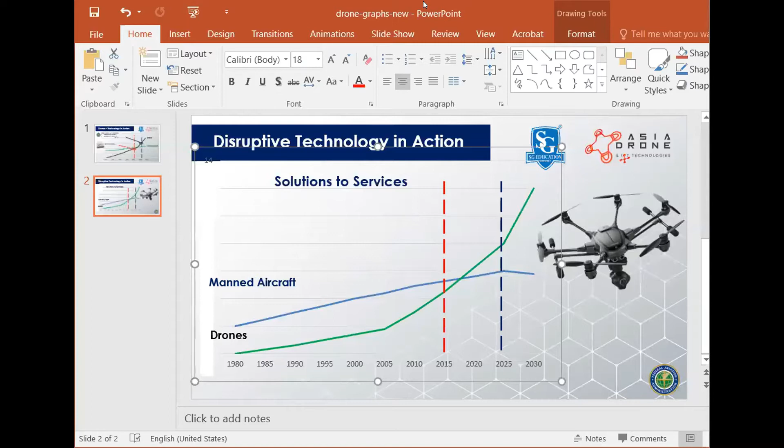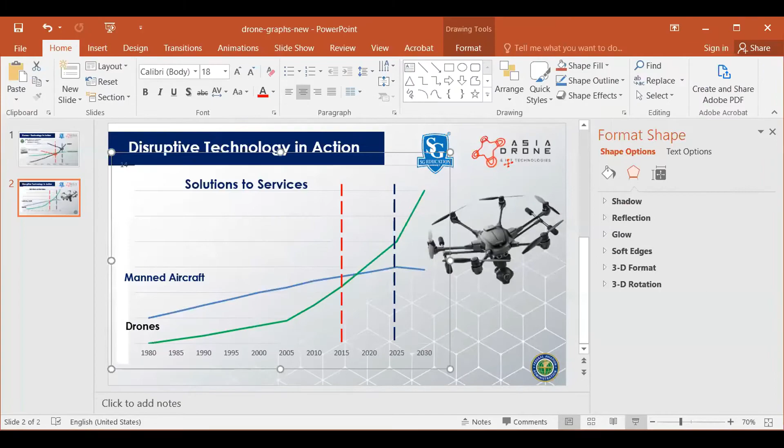Now, this is a journey where you can see the blue line represents the manned aircraft, kapal terbang dan sebagainya, and the drone represents the green vertical line, whereby if you see it, it all started somewhere in the early 1980s with progress towards transportation and so on. But somewhere between 2015 towards 2020, the manned aircraft and drone collided - the vertical arrows, the progress collided - because the drone took an inflection point where it began moving from solution to become services. So it undertook the path towards an inflection point, moving from solution towards services.

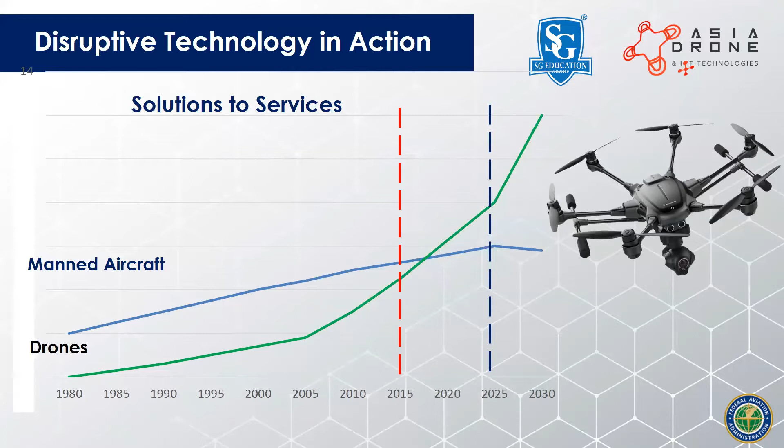All right, let me share my insights. As I mentioned just now, overall this journey just showed the manned aircraft as steady technology rise and use cases. Drones started to be used outside of military in the 2000s and had a rapid increase in use cases and cost reduction. And in about 2018, the number of commercial drone companies passed the number of manned aircraft operating companies.

Maksudnya pada tahun 2018, syarikat yang membekalkan servis drone telah meningkat dan melebihi daripada syarikat-syarikat kapal terbang. So maksudnya bidang drone ini menjadi satu bidang teknologi disruptif, di mana ia mula mengambil tugas man aircraft dan sebagainya. Katakan helikopter kita nak gunakan untuk ambil gambar dan sebagainya, sekarang drone menjadi peranan yang penting. So dengan itu, bila drone ini memainkan peranan yang penting, that means when it plays an important role, then it should be given importance. So that is the reason this has got into the limelight of government regulators, industries, and so on.

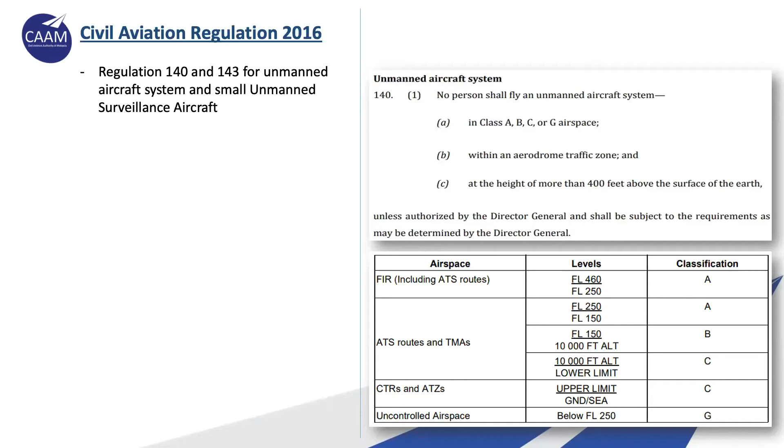Next, Regulation 143, Small Unmanned Surveillance Aircraft. I would like to emphasize point 1A and B, which is the restriction to fly over designated areas, where designated area means any area used for residential, commercial, industrial, or recreational purposes. Authorization from CEO is required if you intend to fly a drone over these designated areas. Please do read the rest of the regulations by downloading the MCAR 2016 document.

Okay, we go to our current initiative. As of now, we have released or published, on the 1st of March 2021, 3 civil aviation directives, namely the Remote Pilot Training Organization (RPTO), Agricultural UAS Operations (AGR), and Special UAS Project (SUP). So we have 3 CADs.

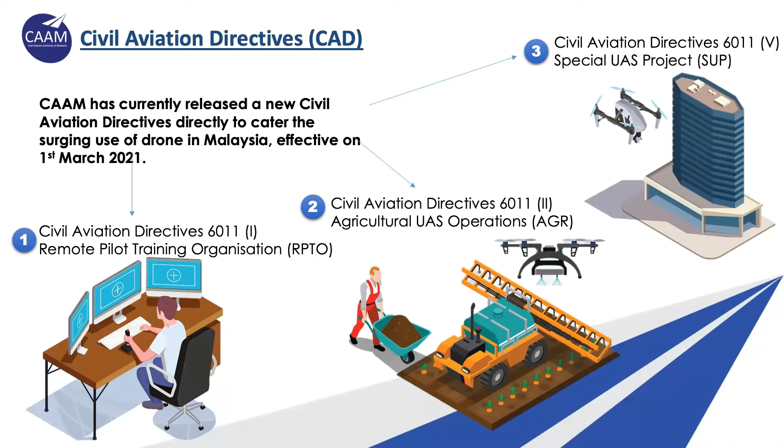This one is the Remote Pilot Training Organization. At the moment, we have received quite a number of applications, more than 12, to be exact 16, applications from companies throughout Malaysia with the intent to become an approved RPTO. We thank all those companies for their support and great response.

For your information, RPTO is one of the important parts of our directive. Without it, CAAM is unable to approve and confidently verify that the intended UAS operations detailed in the other 2 CADs, whether for agriculture or for special UAS project, can be operated safely within the operational limitations and requirements.

This cautious approach is needed in order to protect the interests of both the operator and the general public. In summary, RPTO will be the approved training organization for drone pilots to get formal, theoretical, and practical training in order to obtain the Remote Pilot Certificate of Competency (RCOC).

I believe for better understanding, please do read the RPTO CAD, which can be downloaded from our website. If we have any further questions for this CAD, I can probably answer it during the Q&A session.

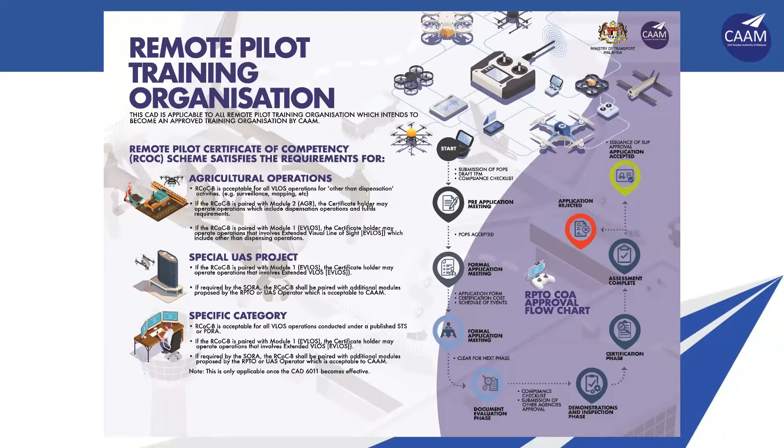Next, for agricultural UAS operations, while we are aware that drones or UAS are being used to dispense agricultural payload such as pesticides or fertilizers, with great and positive impact to food production or yield, and at the same time it reduces time, money, effort, manpower, and cost.

Such operation, if it continues without any regulatory supervision, we are afraid it is just a matter of time before a bad incident or accident occurs, where people could get hurt or injured, or worse. Therefore, we hope once we have approved one or more RPTOs that offer agriculture UAS training, all operators involved can quickly enroll for the training program and obtain the necessary certificate of competency.

Again, you can download this CAD document from our website for further information. This infographic is also available on the website so that you can get a fuller understanding of the details.

Next, for special UAS project, in order for us, CAAM, to allow drone operations to operate longer or further in terms of duration and distance, in case of beyond visual line of sight operation or flight, or to conduct riskier drone operations.

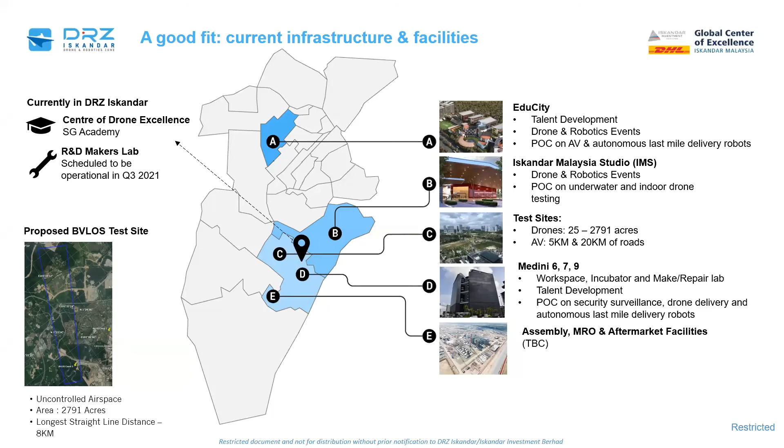So some of the progress today, apart from some of the test sites that we have identified and the Makers Lab that will be operational, we're also happy to say that, working closely with MAGIC and NTIS, we have received the first cohort of the POCs, which we are processing right now.

We have successfully conducted a POC recently for surveillance and security. There are many more in the pipeline, for example in the delivery of emergency medical equipment and also in security. These POCs would take place later on, but right now it has to be put on hold because of the MCO situation. Hopefully after this, there'll be a lot more taking place in that location.

In terms of talent, SG Academy has recently opened up their center over there, and managed to squeeze in a 5-day workshop right before MCO started on drone maintenance and repair. This workshop got a very good response, about 50 people registered for it. So this center will offer short-term courses and long-term courses. Be in touch with us if you are interested to see how you can be part of this and enroll in some of the courses.

Apart from drones, we also have robotics companies already setting up in our location, taking advantage of the location where they need to service their southern region clients and also penetrate into the Singapore market. At the same time, we are receiving a lot of inquiries from companies in Singapore looking at scaling up and growing.